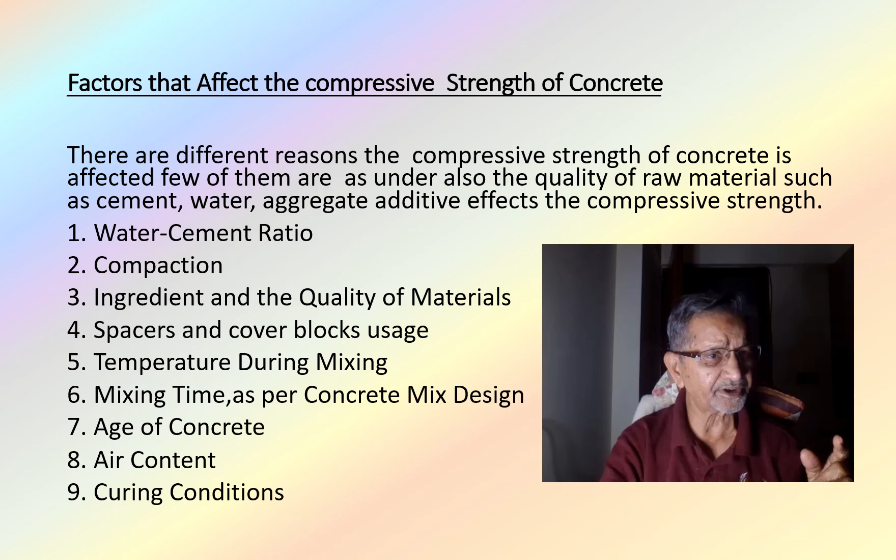In the next slide, we will discuss mainly two points of concrete, which are plain cement concrete and reinforced cement concrete. So this is the brief description regarding the compressive strength, effects on compressive strength of the concrete. Dear engineers, the viewers, architects, project management companies, the contractors, we are discussing today about the effects on concrete of different aspects and different factors.

So, in slide number 2, we will discuss the water cement ratio. What is water cement ratio? As you know very well, water cement ratio is one of the most important factors affecting the compressive strength of the concrete. It refers to the amount or the weight of water in concrete mix relative to the amount or weight of the cement. So this is a brief description about the water cement ratio. What aspects are there making the effects on concrete due to the water cement ratio?

A high water cement ratio results in weaker concrete because excess water dilutes the cement paste, and it weakens the concrete strength. And porosity also occurs. Pores are there, which is harmful for the concrete. A lower water cement ratio generally produces stronger concrete as it allows the cement particles to bond more effectively. A water cement ratio of about 0.45 to 0.60 is ideal for achieving high strength concrete, depending on the desired performance and the mix design. So this is the water cement ratio.

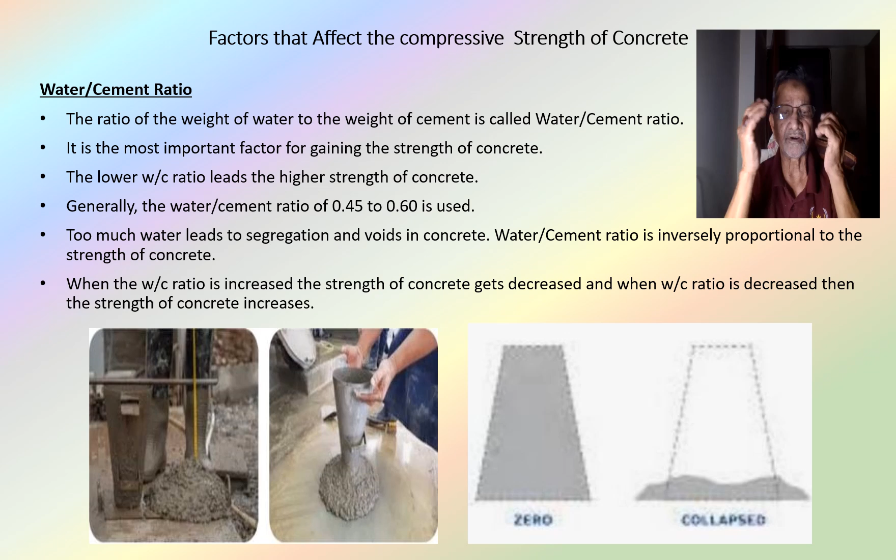How can we test the water cement ratio proportions? There are a few pictures in this slide, and we are using a cone, we are using a tamping rod, and we are using a tape to measure the slump of the concrete. The slump of concrete shows whether the concrete is durable, strong, or it has failed. So you can see a few pictures there, which is zero slump. That is also not useful, because the concrete will become very stiff. Then the failure of the concrete is also in one of the pictures.

Vibrator machine is used. There are qualities of the vibration machine. There are qualities of the needles to be used in vibration machine. This is a very huge topic also. I am just touching the topic of each and every aspect affecting the concrete.

So, compaction is the process of removing the voids from the freshly poured concrete to achieve maximum density of the concrete. Insufficient compaction leads to voids, honeycombing, and cracks, which weaken the concrete strength. Over-compaction can also cause segregation of the mixed concrete, which is harmful for the concrete. So the segregation should not happen.

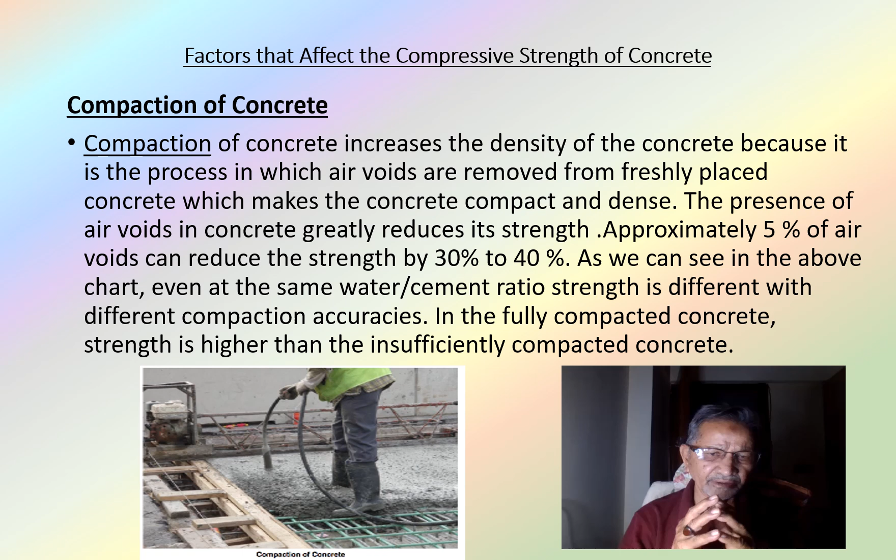Proper compaction ensures that the concrete is dense and strong, reducing voids and air pockets from the concrete, thus increasing its compressive strength. If you take care of all these things, you will get the best results of the concrete. There will be no hollow sound, no voids, no porosity, and no cracks if you are properly compacting the concrete.

Dear viewers, we are now going to discuss the ingredients of the concrete in slide number 4. The ingredients of the concrete are commonly cement, water, aggregates, and additives we are using sometimes. Cement acts as the binder that holds the mix together as it hardens. The most commonly used type of cement is ordinary Portland cement, which may be called OPC also.

Water: first of all, we have to test that the water is fit for use in mixing concrete and also for curing. Water reacts with the cement to form a paste that binds the aggregate together. The water to cement ratio, as I discussed in my previous slide, affects the strength and workability of the concrete. Aggregate: there are two types of aggregates, as I said, fine aggregates and coarse aggregates.

Fine aggregate is usually sand, which fills the voids between the coarse aggregate and cement and helps in giving strength to the concrete. Coarse aggregate is larger material like gravel, crushed stone, or rocks that provides bulk and strength to the concrete. Admixtures, we are using sometimes also: chemical or mineral additives that improve the concrete's properties such as workability, durability, and curing time. Common admixtures include plasticizers, retarders, accelerators, and air entraining agents.

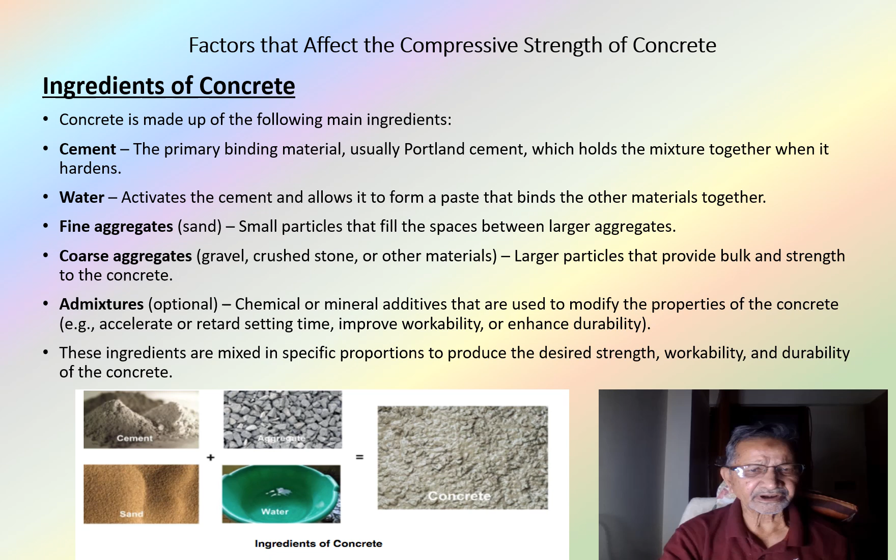Dear engineers, in continuation of the factors that affect the compressive strength of the concrete, an important factor is to provide the spacer blocks and the steel chairs in reinforced concrete. Spacer blocks and chairs should be used to maintain the nominal cover to the reinforcement. These spacer blocks are placed at a maximum distance of 1 meter apart from each other. Material for the spacer blocks should be such that they get proper strength so that they do not break or get damaged during concreting.

These spacer blocks are to be cured for 7 days at minimum so that they attain the proper strength and are not damaged. Then we will discuss the steel chairs. These chairs are used to separate the two layers of the reinforcement. These chairs are made with the reinforcement used in the concrete. Minimum 10 mm reinforcement is used to make the chairs.

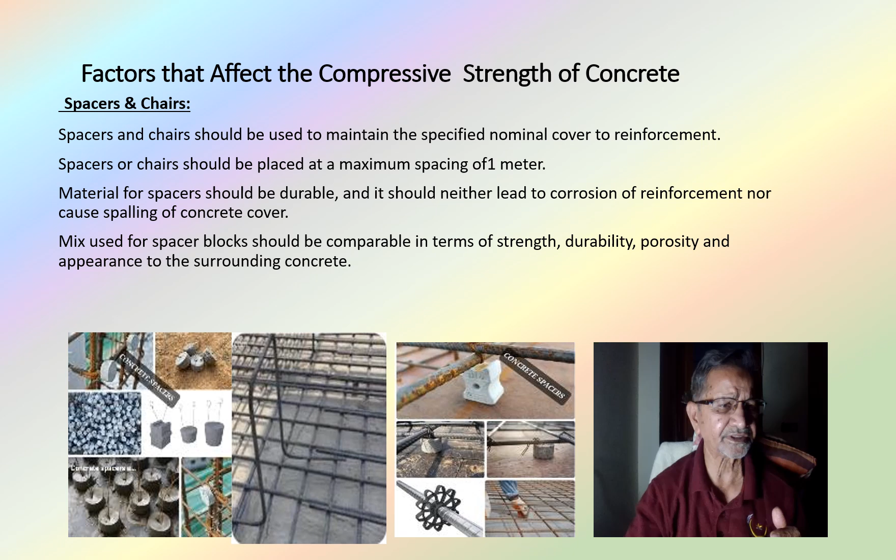Dear engineers, in slide number 6, we'll discuss how to control the temperature of the concrete during the pouring and after the pouring. So during the pouring, we have to see that the concrete temperature factor is very important. It's playing an important role, and actually it is related to ambient temperature and the temperature of the concrete itself. So if the temperature of the concrete is high and ambient temperature is also high, we have to control this

temperature during the mixing of the concrete, because there are so many plants used in different locations, like the local mixer machines, the central plant, where the concrete ingredients are mixed, including the water, cement, sand, aggregates, and all that. If the ambient temperature is high, while rotating the concrete, it will become even higher.

So we have to minimize the temperature to 32 degrees centigrade, which I am telling you from my memories, because I was taking care of all these things, and I was controlling the temperature of the concrete when it was arriving at the project. So the ambient temperature is to be recorded. Also, the concrete temperature is to be recorded when the concrete is arriving at the construction site.

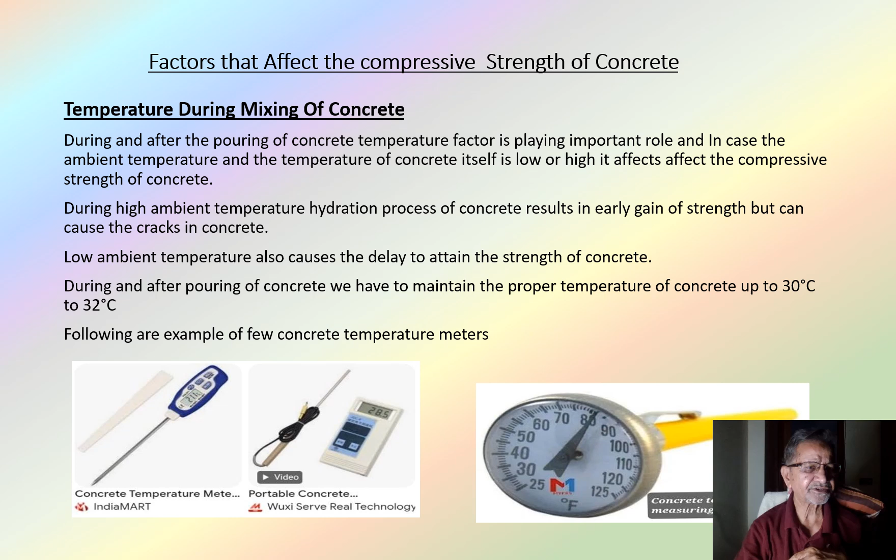There are so many instruments. There are one, two, three pictures in slide number 6. So you can go through that and see how we have to test and check the temperature. Thank you.

Dear viewers, the engineers, you must have practiced the curing of the concrete after pouring for at least 24 hours, especially for the slabs and beams. The strength of concrete depends on curing also. Curing is the most important factor to achieve the proper and maximum compressive strength of the concrete, because during the drying time, the hydration process continues for the adequate period to achieve full strength of the concrete.

Inadequate curing or incorrect curing means excessive water is used, or the curing is not done properly. It makes the concrete of lower strength and it weakens the concrete. Curing typically keeps the concrete moist for at least 7 days to 28 days.

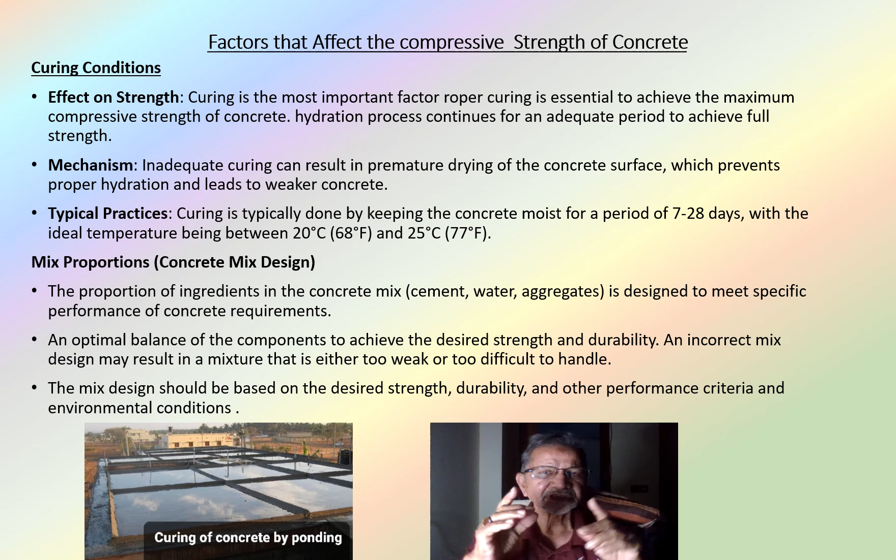And at each stage, after 7 days, after 14 days and after 28 days, the concrete test is done by making cube molds or cylinders. These cube molds and cylinders are sent to the laboratory for testing the concrete. If proper curing is done, you will achieve the proper strength of the concrete. Curing, I mean, the curing concrete temperature should be 20 degrees centigrade to 25 degrees centigrade.

The proportions of ingredients of the concrete, meaning mixing components like cement, sand, water, aggregate, all give the performance, including the curing of the concrete, which is very important and you have to take care of that. Curing of slabs is done by ponding the area of the slab. The beams and columns are cured by covering with hessian cloth, and continuous curing is done for at least 7 days. So this is the process of curing.

Now the mix proportion design or mix design is also to be discussed in the same slide. The performance of the concrete ingredients like cement, sand, aggregates, additives and water is important. So the performance of the concrete depends upon all these ingredients.

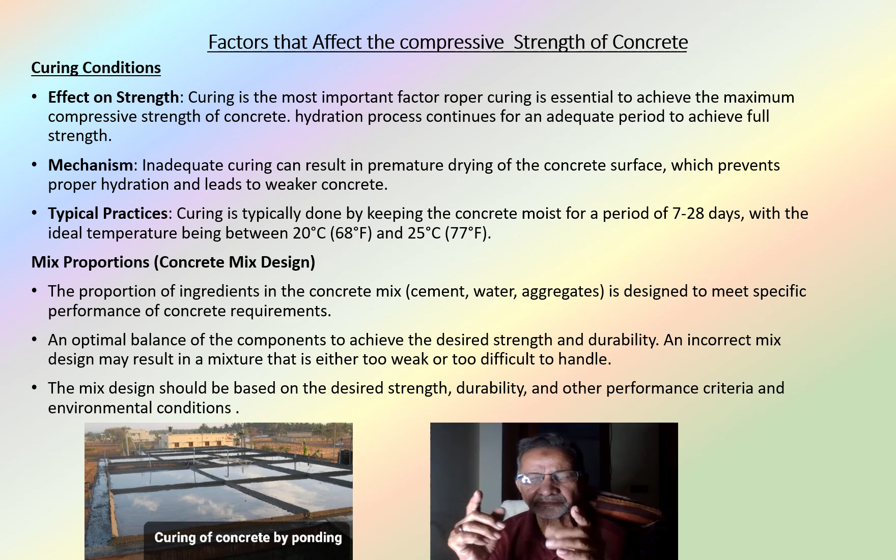So in these slides we have discussed the curing and the mix design of the concrete. The mix design also has to be done by the structural engineer, and a sample or specimen for the mix design is to be sent to the lab to be tested so that it achieves the proper concrete strength. So these are very important issues to be taken care of.

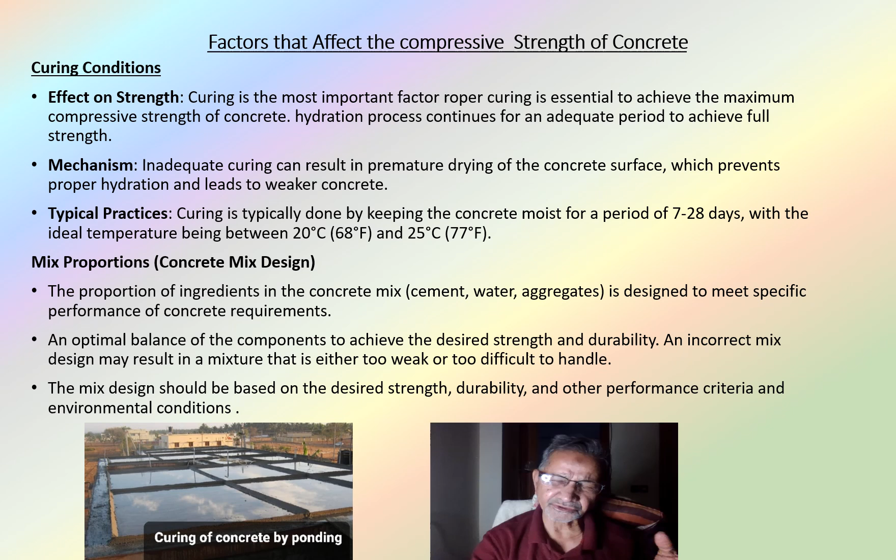Dear viewers and engineers, now we are going to discuss the time of mixing of ingredients for the concrete. The way concrete is mixed and the time for mixing can influence its compressive strength, which is very important to be considered. Inadequate mixing may result in non-uniform distribution of components of the concrete, leading to weaker concrete, and you are not going to get the full strength of the concrete. Over mixing also affects the concrete, which can cause a loss of workability and lead to segregation, affecting the strength of the concrete.

Segregation means the components of the concrete like aggregates, sand and cement are separated from each other, which is not a durable concrete. Proper mixing ensures a homogeneous mixture. For that, a proper time of mixing of the concrete is necessary, which improves the bonding between the cement, aggregates and water, resulting in stronger concrete. Different machines are used. You can see a few pictures here, like the batching plant where the icing unit is also available, which can be added for the time the concrete is mixed.

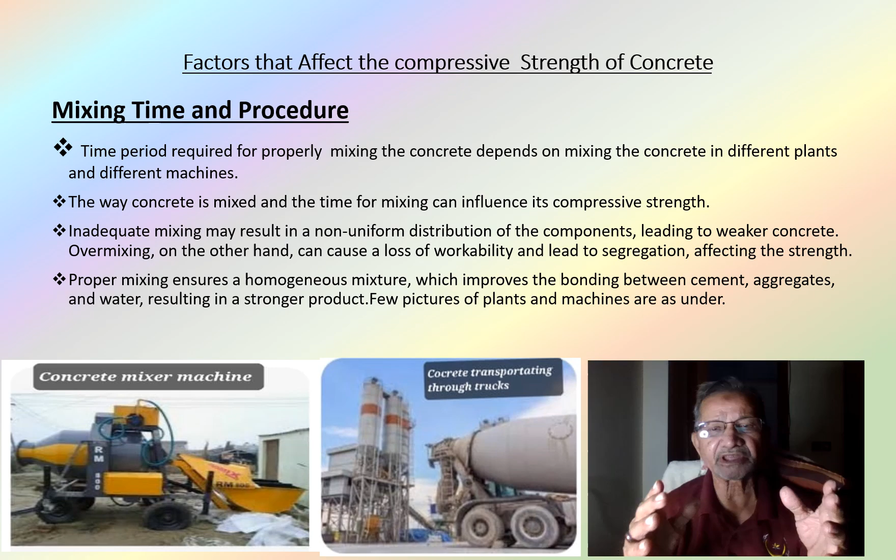Also, in the mixer machine, the duration of the revolution of the drum of the local mixer is 2 to 3 minutes. Otherwise, the concrete will get higher temperatures, which is not advisable for the concrete, and it weakens the strength of the concrete.